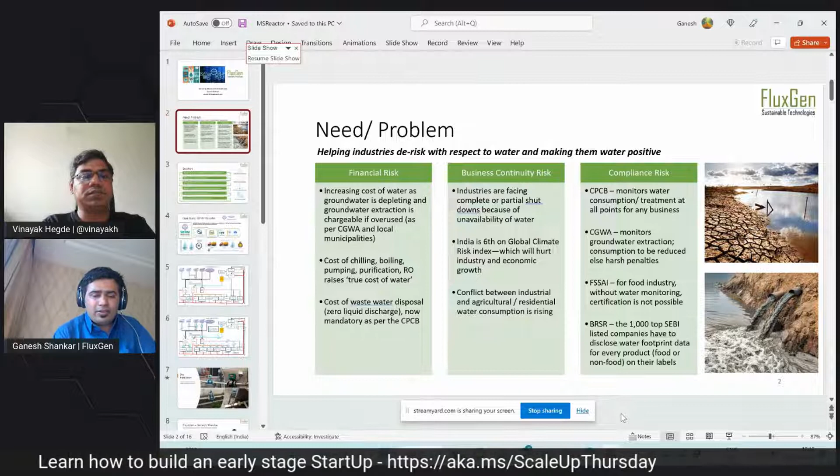Sure. Our belief is just like how water as a liquid is transparent and clear, what if you make the data of water transparent and clear, and build a solution on top of it? Can you solve the water crisis? We believe yes, because what doesn't get measured cannot be managed. So what we do is identify leakage, wastage, excessive usage, and water quality to make sure that water usage can be reduced by up to 30%.

So how we do it is basically we use IoT and data science. We monitor flow, level, pressure, various water sensors in an infrastructure, from input to output and in consumption, and generate high quality reports which are required for compliance, such as Central Pollution Control Board and even groundwater related regulation.

We give prescriptive alerts on our platform, so that way you are able to identify what action needs to be taken. What would take a day, a week, or months to solve the problem, you are able to fix in less than 20 minutes through our dashboard.

Since we have complete understanding of the water infrastructure, we are able to make sure that if there's a downtime in any of the water systems, especially wastewater management systems, because if there's downtime they have to transport the water, we've been able to handle that through our platform.

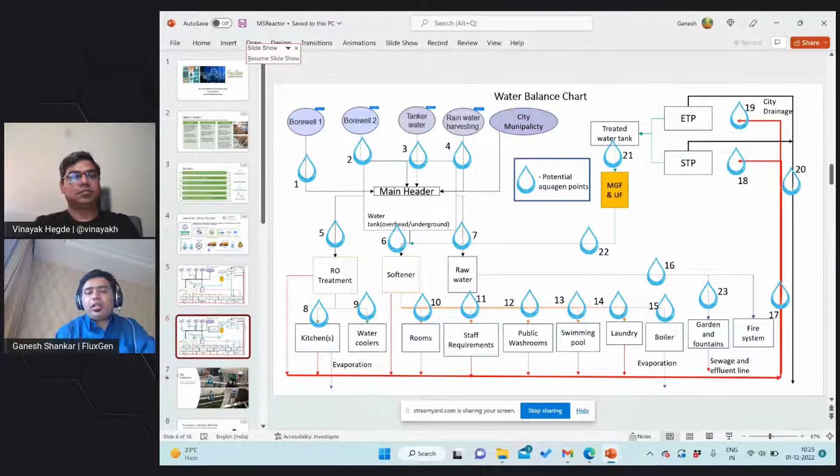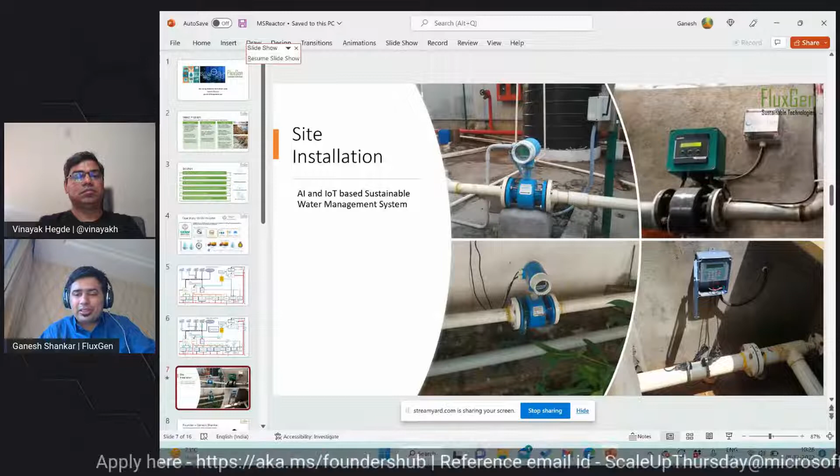On the bottom right, you can see a more advanced flow meter where we've put up the water flow meter onto the pipe without even cutting it - it's just a clamp-on kind of thing. Ultrasonic waves go in and return back, and the change in phase velocity lets you know the flow of water. Like this, we have been able to deploy these devices.

So this is fairly a bit about how our customers generally use our product.

I had a follow-up question on the earlier slide as well, and maybe this slide too. How much of the water typically - I can see the STP and ETP - how much of the water is typically recycled, and what is the quality of that recycling? Do you use it for sewage or toilet systems, or is it purified to an extent that it can be used as drinking water or for industrial uses? I want to know what percentage of water is recycled, because that has a direct impact on the environment - since you're reusing the water, you're not taking water from the environment, meaning there is water in the water table that's not getting consumed.

So actually depleting your water resources much lesser, which gives them time to kind of getting replenished as well, right? Yeah, very pertinent question you asked, Vinayak.

So yes, almost all the water that goes to the water treatment plant—if an industry is consuming overall 100 kiloliters, just for the sake of example, at least 60 to 70% would go for water treatment. Rest of it will be consumed as drinking water and various other processes, but almost 60 to 70% water actually gets treated, and all that water has to be treated. Since the requirement today is zero liquid discharge, you can't be discharging any water which is not treated. So when you say zero liquid discharge, you are discharging zero effluent into the environment.

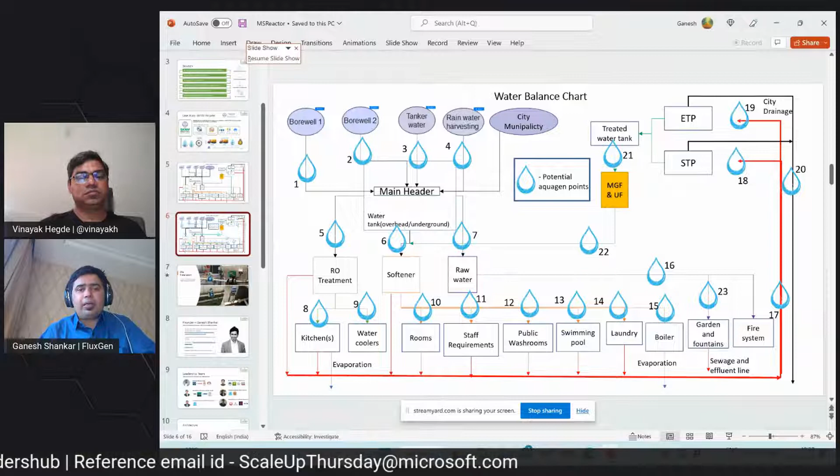So to the question on whether this water will be utilized—yes, part of this water depends on the treatment technology. Because getting water treatment to drinking water capability is very expensive, it is not yet practiced in our country, but it is practiced in countries with very scarce water availability, like the Middle East. But today, that treated water is used in various ways. For example, in the textile industry, they reuse most of this water in their facility for various processes. But in food processing and beverage industries, the treated water is not up to the quality needed for producing food grade materials. That's why it's generally used in gardens and various other places where this water can be utilized.

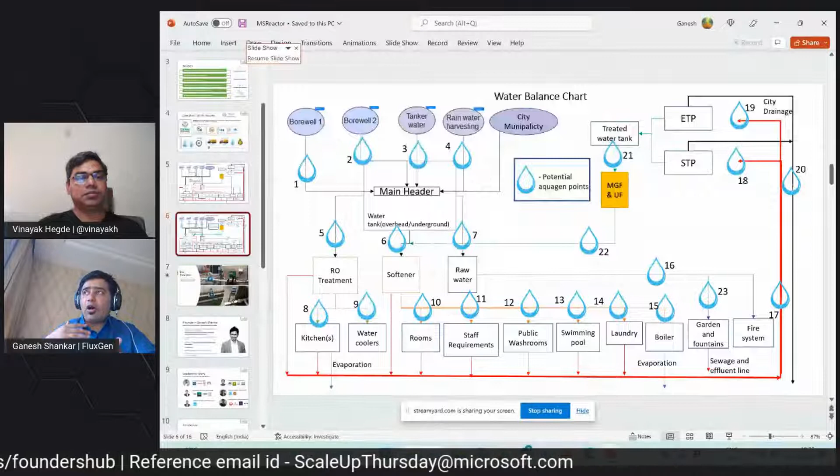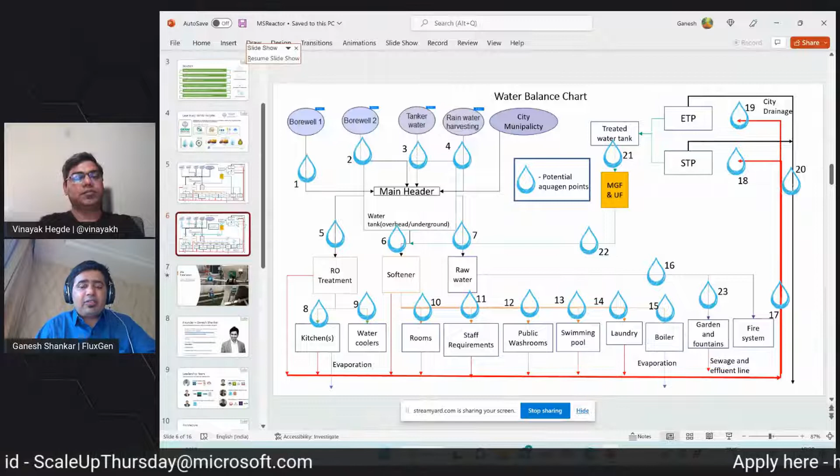There's a biodiversity component that has to be maintained in any facility today. I see that in all Microsoft facilities, they've managed it well—even all industries today practice biodiversity in terms of having more trees and other things, and that water comes through this treated water. So no fresh water is generally utilized for that; fresh water is generally used for consumption. Treated water is utilized for all the trees and plants, so almost all the treated water is utilized within the fence itself. And if the water quality is good enough, it can also be used for recharging groundwater.

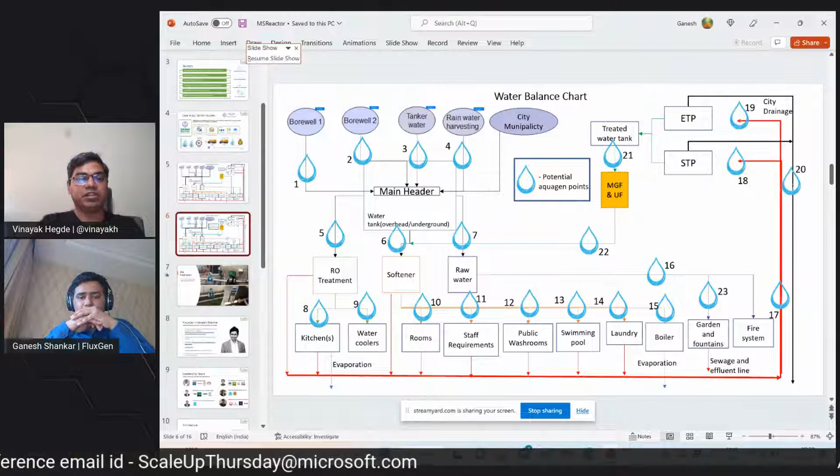That is excellent, Ganesh. We have talked about the problem and how we are solving it in a unique way. Especially fascinating for me was the last slide, where you talked about the different sensors and the fact that the sensor is non-intrusive—meaning you don't have to change existing infrastructure to use your product, which is a huge win. Because the amount of time it takes for installation hopefully goes down, and it's very non-disruptive to what already exists—you don't have to cut pipes or do that kind of thing, which is fantastic. So maybe I also want to talk a little about the team that is building this, and a bit about your background, your journey, and how you stumbled upon this specific problem, plus a bit about your team and how they're coming together to solve it. That would really help, and then maybe we can do a slightly deeper dive into the tech as well.

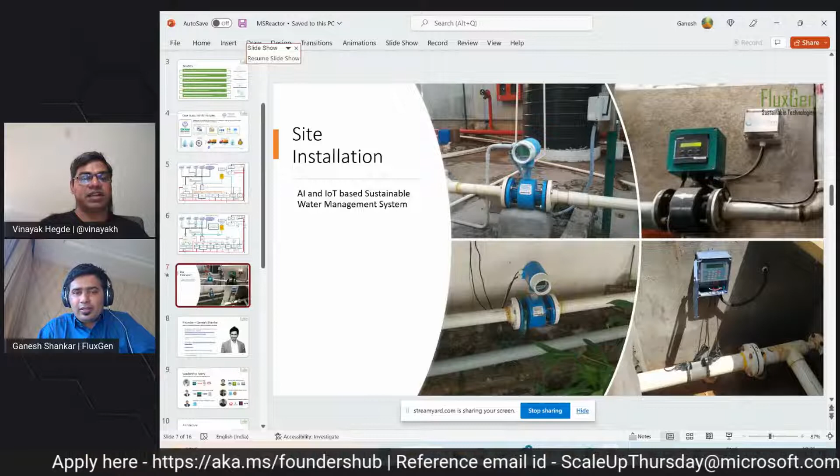Surely, surely. Yes, I've included the team slide and a bit about myself, as I think this can be useful to the audience. So, a bit about myself—it's a single founder company, so I could only put my picture in this slide, but I have colleagues who are doing most of the work, shown in other slides. As I already said, I did my education in telecommunication engineering at RV College, and I worked at ISRO for a short duration. I had a strong interest in aerospace, then did my master's at the Indian Institute of Science. Later on, I joined General Electric in their aerospace business because I was interested in that.

So, having had my share in building a solar intelligence company along with my two other co-founders, I decided to build a water intelligence company today, and that's mainly possible because of my strong team.

So Deepak himself had worked in energy business for more than 12 years in L&T. He was managing energy meter business for whole of South India, one of the best employees for nearly 6 consecutive years. I also used to teach at the Institute of Science, and I met Deepak as my student in a course that I used to offer, and I somehow got him to my company to work with me. Of course, Suraj heads engineering and technology, and Suraj has worked in NVIDIA and other companies as alumnus of NITK.

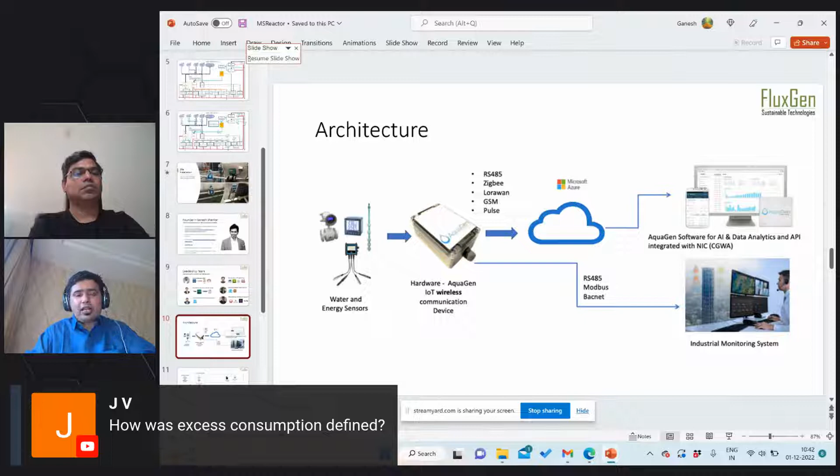So I think what you're saying is that there are different levels of compliance. Obviously there's legal compliance, which is maybe a slightly lower bar, but at the industry level you have benchmarks as well for every process, and also every particular vertical that is benchmarked.

So based on what you said earlier, I think a lot of the water is also getting recycled, and when it's recycled, some of it is going back to the groundwater, which is very heartening. So in some sense, the idea is to get as close to, I'd say maybe zero consumption might be a tough goal in most cases, but get as close to that as possible.

So basically a leave-no-trace kind of mentality is what we are encouraging, especially for commercial usage where there is a lot of water usage in any kind of industry, because the lower the water usage, the lower the cost of treatment as well, as you said, Ganesh. So there is a commercial incentive also for industries to do that, in addition to the legal and environmental compliance.

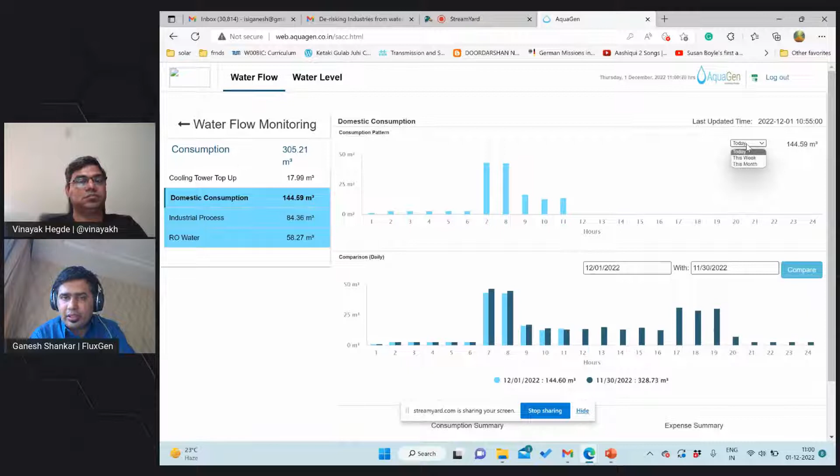So there is also water level - there is consumption at various points, and there's also the water level data. This is showing a flow through the system, like how much groundwater is utilized and available, and how much liquid goes back into the groundwater again.

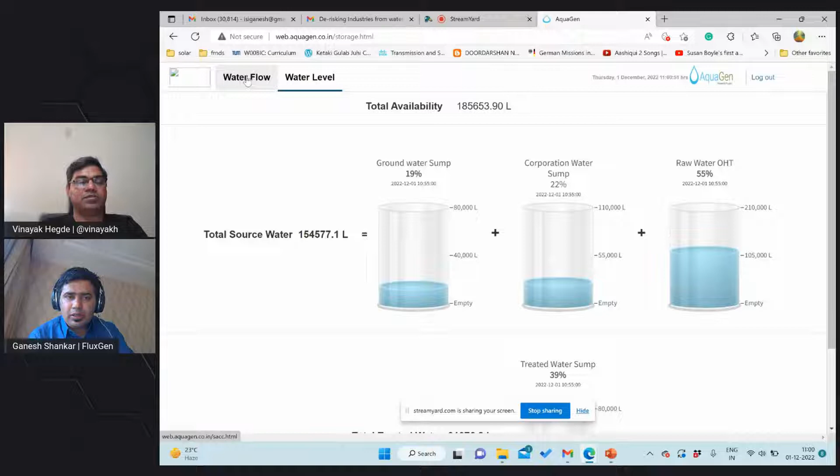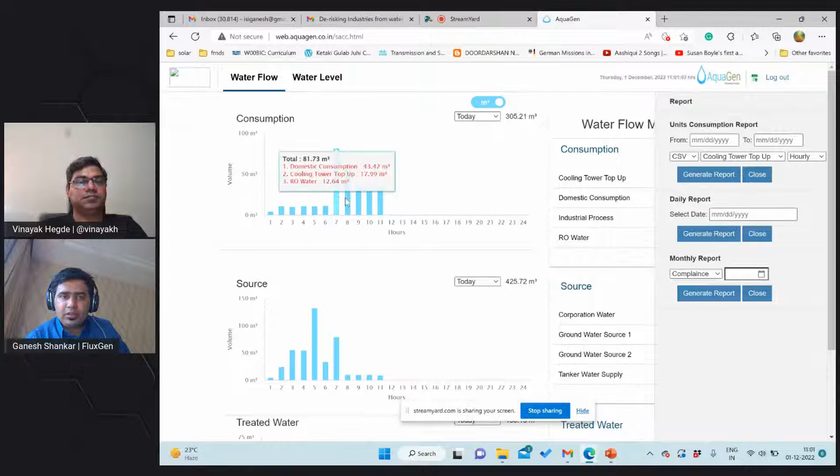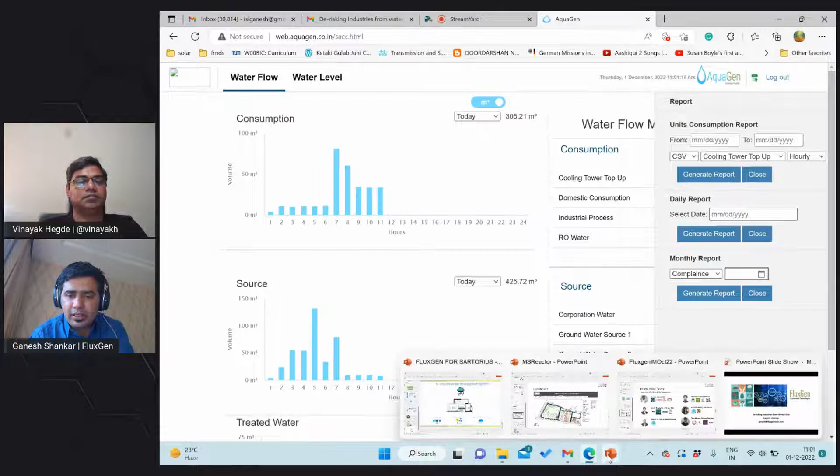There is also generate reports and all those things that come into this from the dashboard. The pop-up comes up in terms of our solution. So this is generally how we've been able to do it. I'm trying to open a comparative dashboard, but it's unable to open - but yeah, this is generally how we've been able to help our clients.

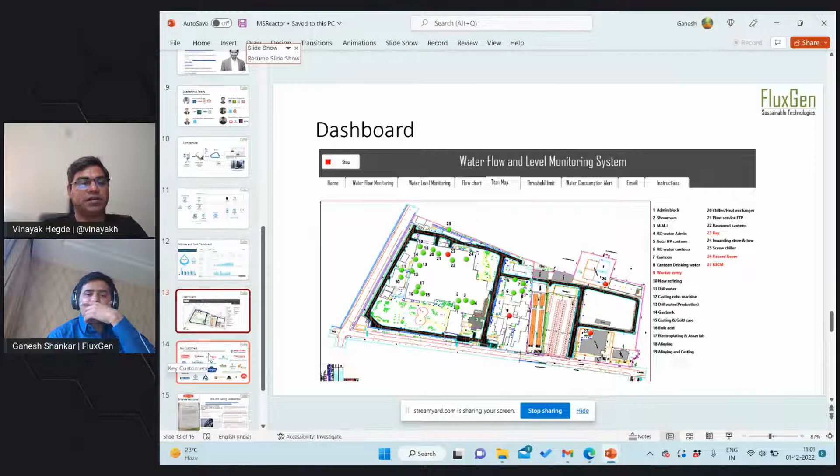Cool, so since you talked about clients, maybe let's talk a little bit about who your users are as well. Yeah, whatever we are today, it's all because of our customers, because they have helped us understand the requirement and we have solved their problems.

These are our major clients and key customers. We have our solution running in more than 50 customers and 100-plus locations, across food processing, beverage, mining, metals, hospitals, and textile. These are our major sectors, even including buildings—we've implemented our solution in various buildings and software parks in Bangalore as well. They've given glowing testimonials, and the Tata Steel Group has done a press release about our partnership with them in solving their water-related issues. We're working with multiple sites of Tata Steel, Tata Steel Mining, and various other groups. That's where we've derived great validation from our customers.

Yeah, cool, I think this is great, because it solves a problem we're facing and will increasingly face as we go ahead. If anybody has any questions, please put them in the chat—we have a few minutes, so we'll take any final questions.